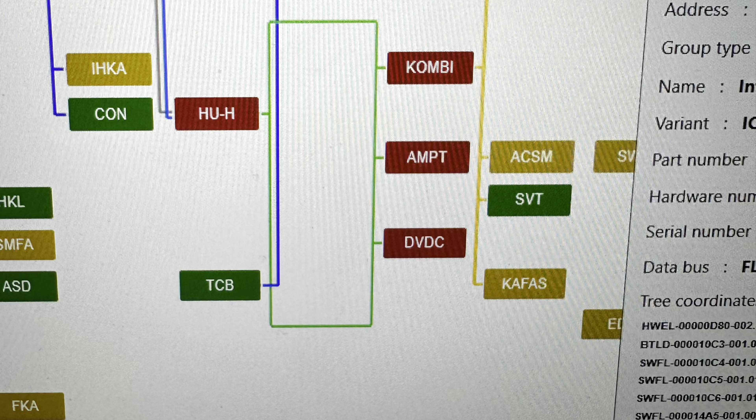So this is what it looks like when your battery or your computer battery dies while you're programming with BMW ISTA. Now my iDrive is crashed, my KOMBI is crashed, my amplifier is crashed, and I forget the other one—I think the tire monitor or something like that is crashed.

Right now I've got BMW ISTA opened up, and I have a working version of ISTA here, so I'm gonna attempt to fix it. Right now I do have all the modules communicating, so that's a plus, because previously I thought I lost the head unit, the amp, the DVD changer, and the instrument cluster. Now I have them all communicating, which is a good thing. They were all red before. I thought I was gonna have to spend like $2,000 to get new modules.

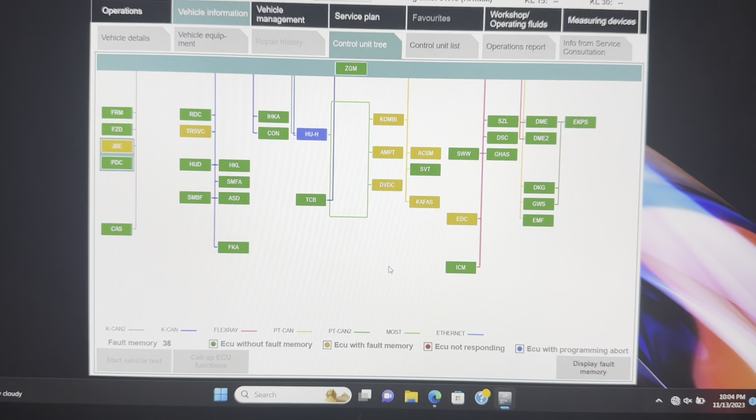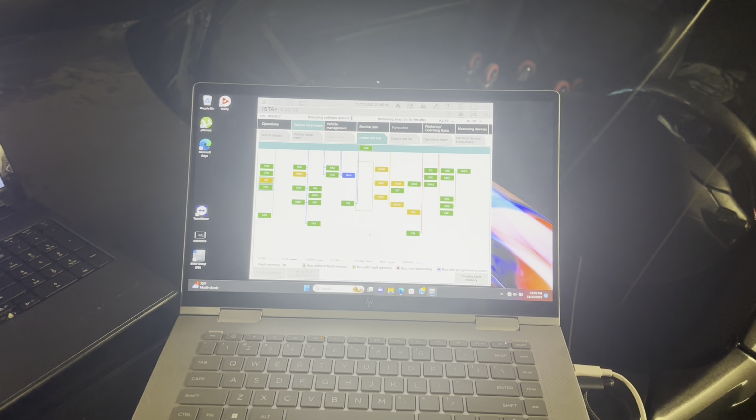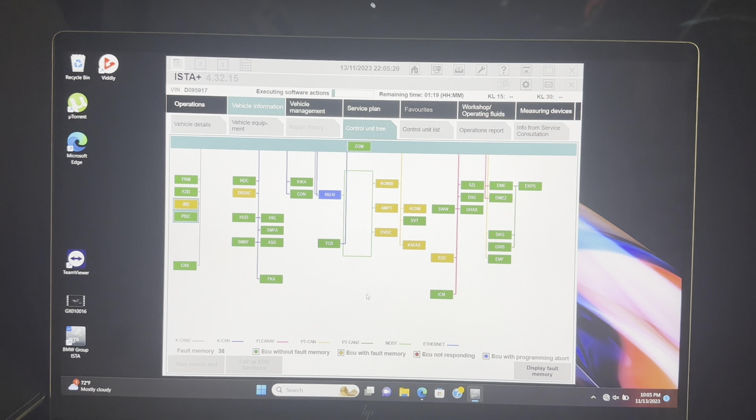The way that I woke them up is I got a nice little charger from Harbor Freight. Charges at 10 amps, which is not great for programming, but it works. It can get you by, and it's better than nothing. And that was like 150 bucks. So I charged the battery up fully, then I came back out, plugged everything up, and the modules are communicating now, so that's a good sign. I was kind of shitting bricks over that.

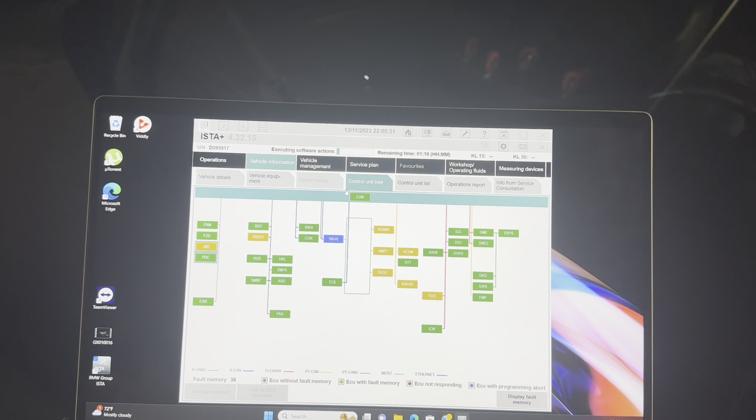But anyways, now we're gonna probably abort this because I think it failed to update. Well, it looked like it did.

Let's take a look at the head unit. Oh, so it looks like it didn't fail. The head unit is actually going through on ISTA. It's now coding the speech in TTS. After that, it'll do the navigation, and that's where it failed last time. So hopefully this works out.

I'm actually gonna leave it for now. And if I have to use BMW ISTA to inject coding data, then I will. But for now, it looks like BMW ISTA is working out.

The crazy thing about this is the car still starts and drives. Like, I can't see the gears, there's no speed, no fuel level, but everything lights up and the car does start and drive, and it drives really good.

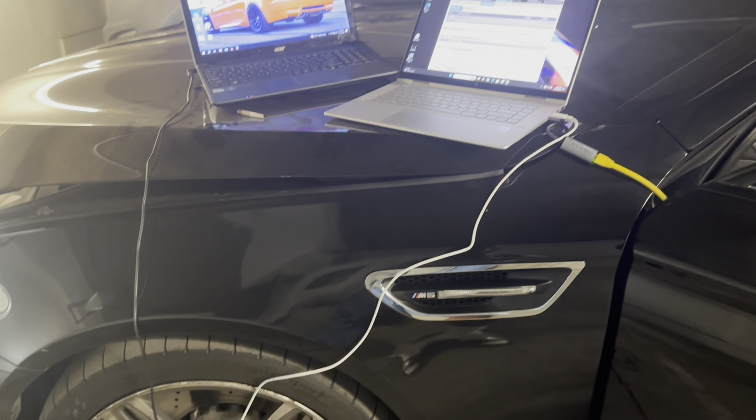I still have a tune on it. So that's interesting. All the suspension and steering settings still work, the brakes work well. You know, no huge problems.

Right now the battery was charged up to 13 volts, and right now it's holding at about 12.8, so that's good enough. You want to be above 12.5 for programming. So I'm going to keep monitoring that.

And yeah, don't brick your car like me. Again, if you're going to start coding and programming, make sure your computer doesn't die, because that's what happened. That old one there with the E92 on it, it died in the middle of programming with ISTA, and that's how my car got bricked.

I had red modules, and it was ugly. Had like 178 faults, and you know, it was bad.

But I think we're gonna get it fixed now. So we'll see. The one that I'm most worried about is coding the instrument cluster, because it says malfunction there. So I'm hoping I can get the coding and the programming right on it.

But right now the head unit is going through a few more steps. It has like 2 or 3 more after that, and then it should finish. The fact that the head unit is on and programming right now is a good sign, because that means the MOST bus is communicating.

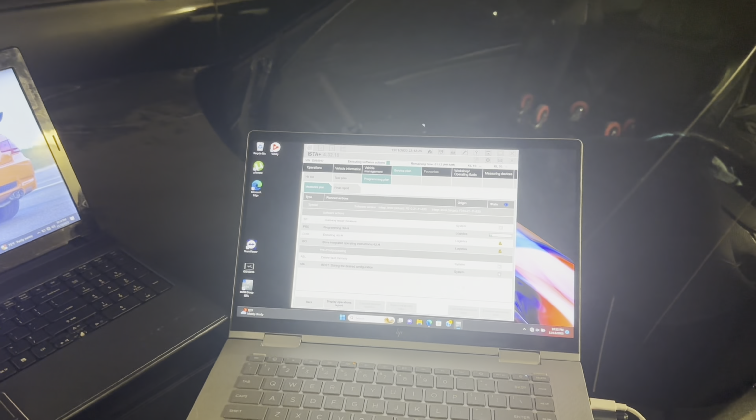That's a bus network that BMWs use, F-Series. They use it to communicate across your media system, like your amplifier, your instrument cluster, your head unit, some other things. So like I said, my computer died during programming, and it basically put my car into a stuck programming state, plus my battery voltage was too low because my charger sucked, so that's why I bought a new one.

And yeah, we're programming now, but when I plugged into ISTA, when the car was originally acting dead, I couldn't even read all the modules off of it, and the ones that I could read were missing some of the coding CAFD files.

So basically what I had to do was go inject the CAFD files manually into the modules that were missing them, because it's basically the settings for the car and the vehicle order, and the entire order wasn't there.

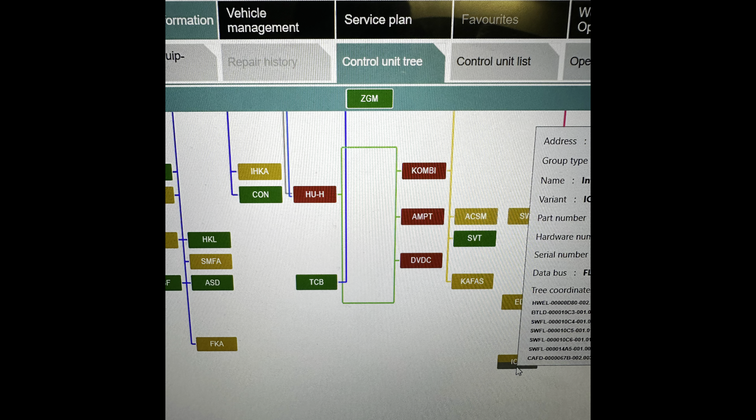At that point I did that, but I was still missing the other modules that I said were red and I thought weren't communicating. Well, they weren't at the time. So then I got this charger, plugged it up, and these modules seem to have come back online, but now they're just stuck in a programming state. So that's what I'm doing here.

That is something interesting that can happen when you're programming. It basically erased coding data from the car. It got lost in the mess, and the car was basically in a coma. I thought I was going to have to tow it to the dealer, but thank God I didn't. So that worked out well.

Sometimes have faith in yourself, and if you have the proper tools, you can likely get it done, even on complicated cars like this.

I was looking for help from like 3 or 4 different people, looking for remote help and stuff, and I was ready to shell out a few hundred dollars for someone to help me. But then I remembered I spent all this time setting this software up, getting these computers, just to do this, and that's why I decided to do it myself.

I'm not saying think of yourself as the greatest thing ever, but just trust yourself sometimes, and try to find the answer, because the information is out there.

I'm only saying that because if you get a car that's bricked, a lot of people will take it to the dealer and they're going to quote you thousands of dollars to replace modules, or just diagnose the thing to wake it up and program it. But I'm doing it here for free.

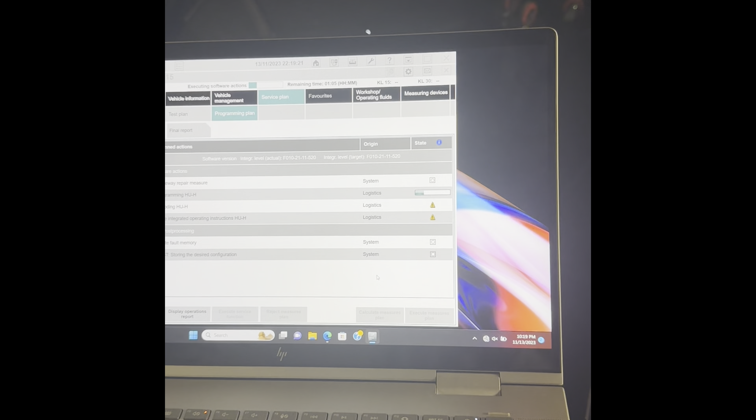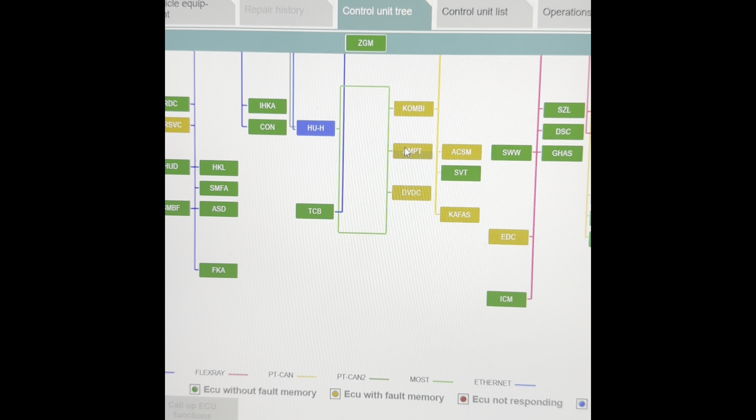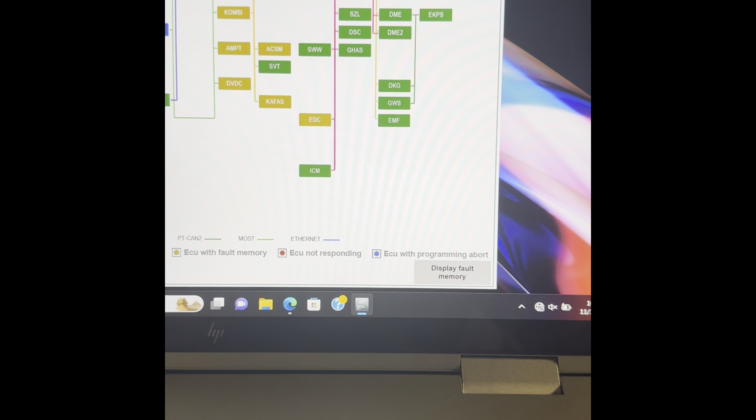Programming with a BMW ISTA. I'm recovering my bricked car because I bricked my head unit, my amp, my DVD changer, and — let's go to the vehicle information tab and see — my instrument cluster. So it was this one, this one, this one, and the blue head unit, which is currently programming and in an ECU programming-abort state because of my previous mess ups. So just a little YouTube short for you. This is all being done at home, by the way.

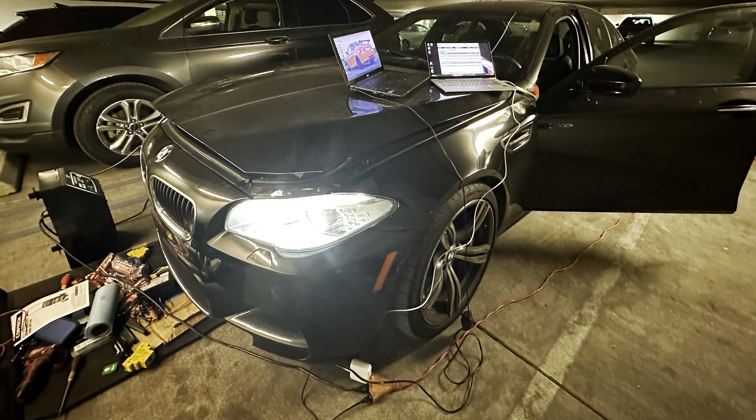Just wanted to update you guys and show you that it is indeed going through with all the programming after having crashed it. Looks like we're going in a good direction.

As far as the instrument cluster, it has the wrong coding on it, and I think that's it, because it is communicating right now. I can see it on ISTA, and the amp and the DVD changer I can see as well. So programming has completed.

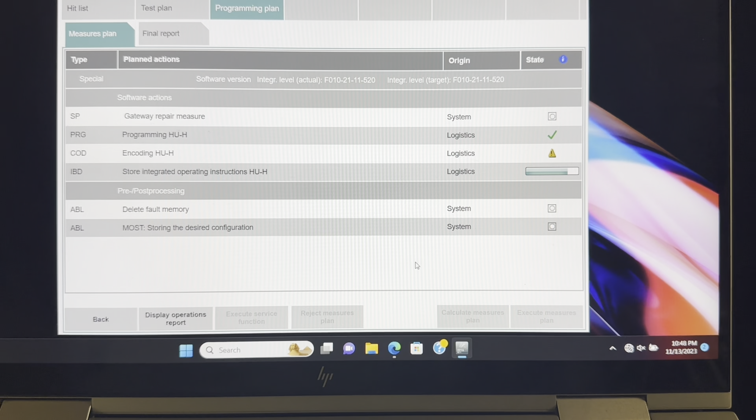Right now it's storing the operating instructions, and after that it'll do encoding. So here we go. Now my head unit is not crashed anymore, so that is awesome.

There's a few more things to work out in code, but just to show you guys that this did work. I woke up my crashed module, so if you guys have issues with that, I might potentially be able to help.

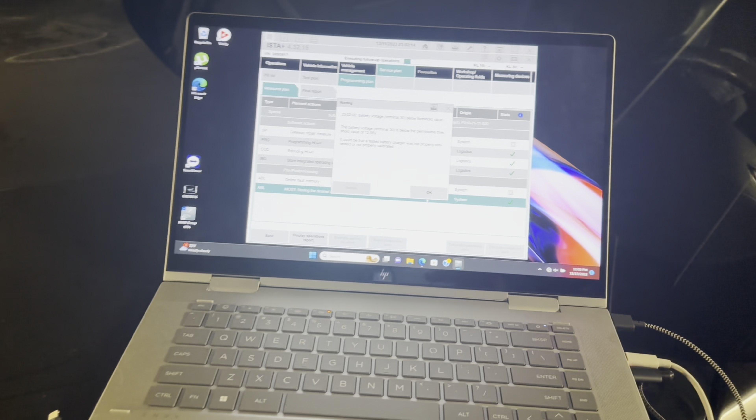So we're now to the next step, guys. My cluster is working. You can tell because my fuel gauge is showing something now, and there's a miles-per-hour and an actual gear indicator. So we are doing really, really good.

Let's turn this AC off so we don't drain the battery too much. But yeah, the car's still finishing coding the entire thing, but everything is working now and not bricked. So wow, look at that.

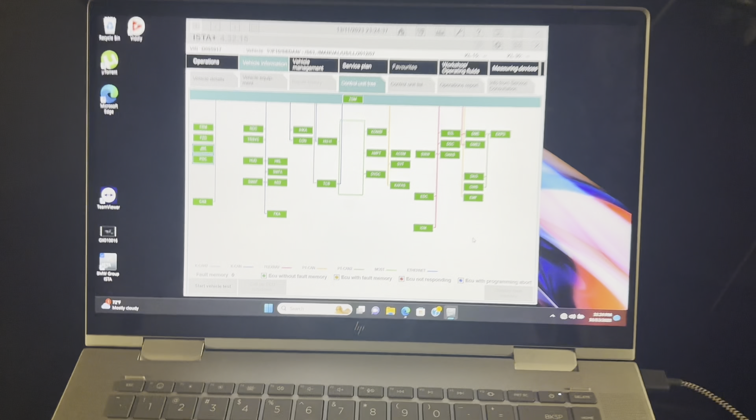So now to conclude the video, I want to show you guys that I did clear all those fault memories. There were like 178 of them, like I showed you before. So programming did work, woke up all the dead modules, and the car is as good as when I got it.